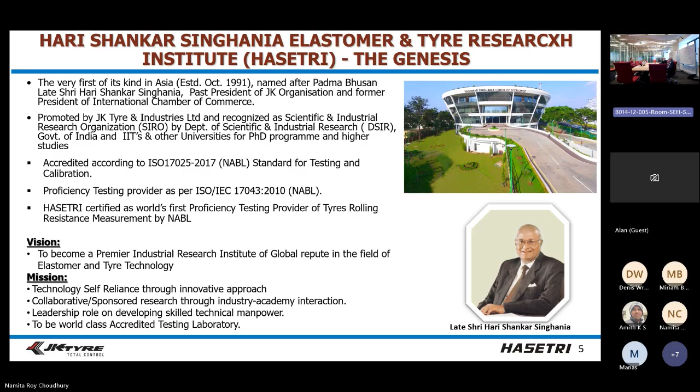Before going to my topics, I would like to say a few words.

Today's economics, our economy, is fossil based, crude based, and this economy developed when the earth housed 1 billion people. But today we have more than 8.2 billion people. The crude-based economy has got a certain problem.

That's the reason the problem is a lot of greenhouse gas emissions. You'll be surprised to know these 8.2 billion people consume about 1.6 times what nature can produce. So if you look today at which industry is mostly polluting, there are three.

One is the energy sector, second is agriculture, third is the automobile sector. The automobile sector produces 23% of the greenhouse gas emissions globally. Today we have 1.2 billion vehicles for 8.2 billion people, and by 2050 the population will be close to 10 billion, and the vehicle population will increase to 2.4 billion.

If you continue the technology what you're doing today, imagine how we can save our mother planet. This is one of the major challenges.

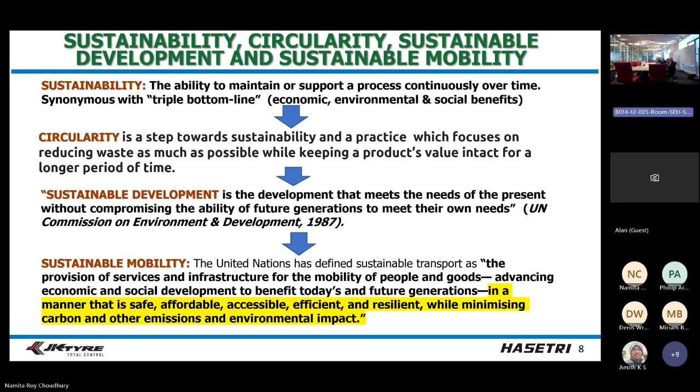When you say environment, that means the way you are manufacturing, the way the product performs. Suppose you make a product built to last. Today a tire gives an initial mileage of 150 to 200,000 kilometers, and after retreading it can give 600,000 kilometers. Now the challenge is, can you make it to 1 lakh kilometers more? That means you require less materials, energy saving, land saving, and so on. So that means built to last.

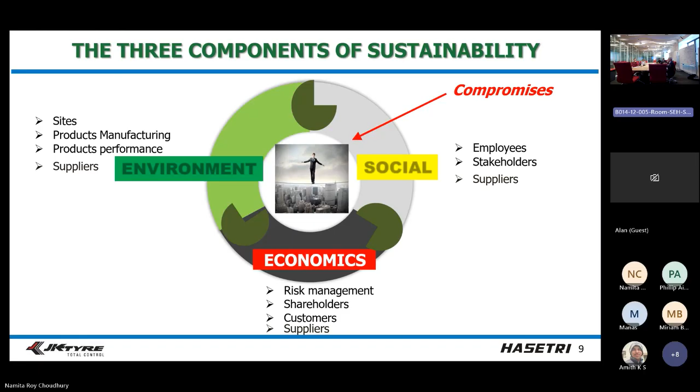Similarly, from the economics point of view, there's risk management, and you have to look at all stakeholders, meaning companies, employees, stakeholders, and suppliers. I will explain this gradually as we go.

Second is labor and human rights, that means forgoing the use of child labor and others, and you have to give social equality.

Third is ethics, there's corruption, anti-competitive practices, responsible information and management. Last is sustainable procurement.

In the rubber industry, consider that about 65 to 70% of cost is material, and out of that, 80% of materials are petro-based. So it's very clear, we are using carbon black, and this carbon black is manufactured from crude at very high temperature, 2200 degrees centigrade, then quenched to 900 degrees centigrade, where a hydrocarbon is split and then quenched to get carbon black. The amount of carbon dioxide generated is about 90% of the tire industry's responsibility from carbon black manufacturing.

Next comes the steel tire cord. Now, steel tire cord, as you know, comes from blast furnaces, so a lot of energy is going into it. So how can this steel, instead of blast furnace, be made using an arc furnace? The energy saving there is about 80%.

Third is the organic tire cord, polyesters, nylon, etc. Fourth is synthetic rubber. So these are the four major raw materials, and they are responsible for the highest amount of greenhouse gas emissions.

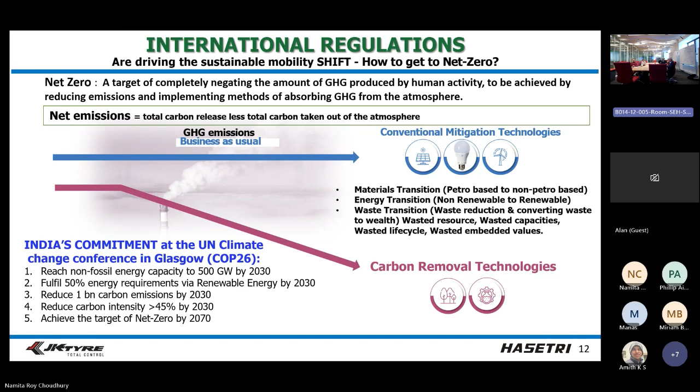So let me consider mass mobility. Instead of individual mobility, if you go for mass mobility, automatically per capita, the reduction will be sufficient enough.

But electrical vehicles are one thing - they can make the city clean. But ultimately, the charging has to be done from our normal source of energy, thermal and others. Unless these electrical charges can be done by solar or any other renewable energy source alternative, you cannot truly say the electrical vehicle is eco-friendly. But yes, for city cleanliness and other things, they don't produce greenhouse gas emissions directly - the city will be much cleaner. That's the reason people are going for it.

How is the automobile industry evolving? Initially it was the IC engine, then came the hybrid, then came the EV. Subsequently, what will come next in emission reduction?

Ultimately, this will come to fuel cell or ultimately hydrogen. That means we have to work towards the hydrogen economy.

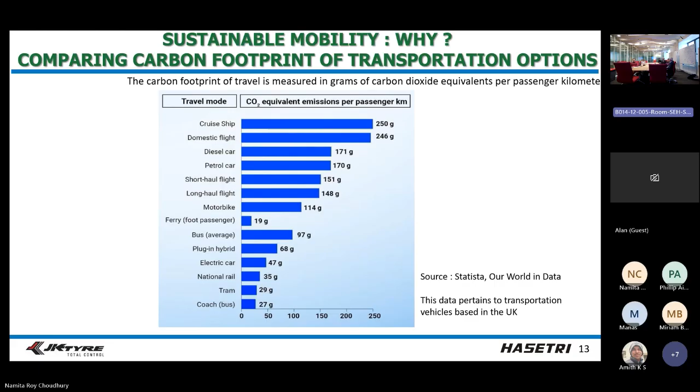India and China, whoever is doing this, since the greenhouse gas emission is going up rapidly, those who are exporters have to develop their products with green technology. That's the reason sustainable mobility is very important.

Now, if we look into that, what are the 5 business models? How to go for sustainability and circularity?

One is, but before that, I want to talk about another term called decoupling technology. Decoupling technology means the growth of the country, economic growth as well as human well-being, will go on. But how do we decouple the growth from resource consumption? What is our capacity? Let us be very clear.

Today we know that we have to produce more material. That means how can we decouple with less material but same performance. That's called decoupling. Second, growth has to be reduced with environmental impact.

Then when the product is on the drawing board, the design engineer must think about how my product will be low weight with same performance, how to use recycled material, or how after product use it can be recyclable. This type of thinking process should come while designing the product. This is called decoupling technology.

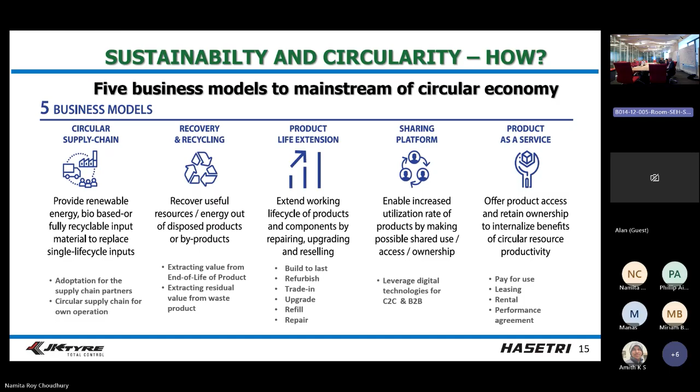Next, let us be very clear about what is actually happening in the mobility sector. The mobility sector has 3 dimensions of negotiation.

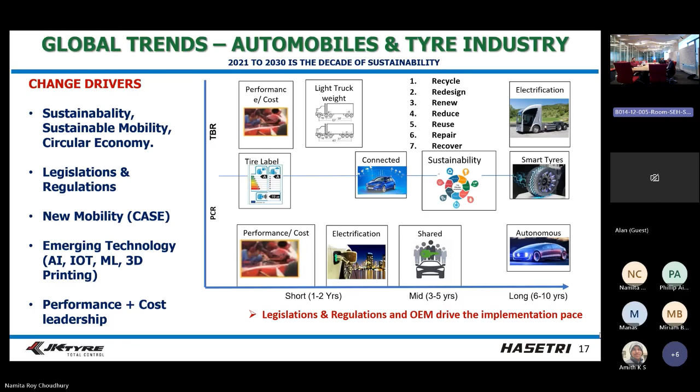Second is technical innovation in the auto industry. That means what is happening in the IT sector, IoT sector, and sensors first reflects in the automobile industry, and subsequently the automobile industry's innovations reflect into the tire industry. So that's what you can call business innovation across industries: automobile industry, tire industry, and suppliers have to work together toward green sustainability. So it's not that policy makers alone can do it, neither can the OEMs nor the tire manufacturers alone.

So what are the needs and the solutions? The need is decarbonization. How can you do it? Lower weight and energy efficiency, so there are less greenhouse gas emissions. Second is the circular economy: recycling and waste reduction. Third is...

...the autonomous car. That means you want your vehicle to be carefree, with no disturbance in between. That's the development that's coming: sustainable mobility leads to sustainable tires and auto rubber components, and then sustainable design, sustainable materials, sustainable manufacturing, and ultimately you have a solution. If you look into all those things together, everybody has a role to play.

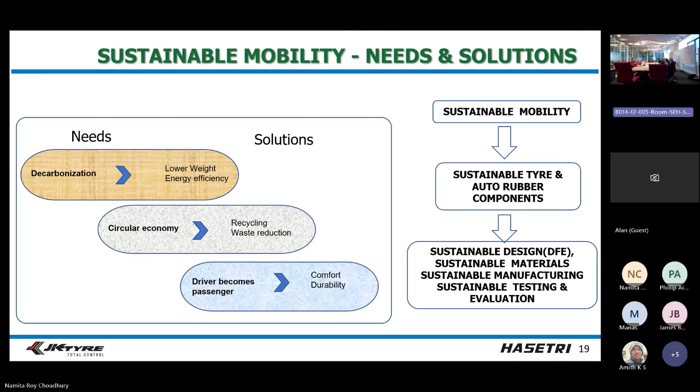Now, next, this is future mobility as already explained. You see connected, meaning vehicle to vehicle. That's why accidents happen, suppose a vehicle is taking a right turn or left turn, so the vehicles will be connected together. This is called vehicle-to-vehicle, which requires infrastructure, and Japan is very much ahead in this.

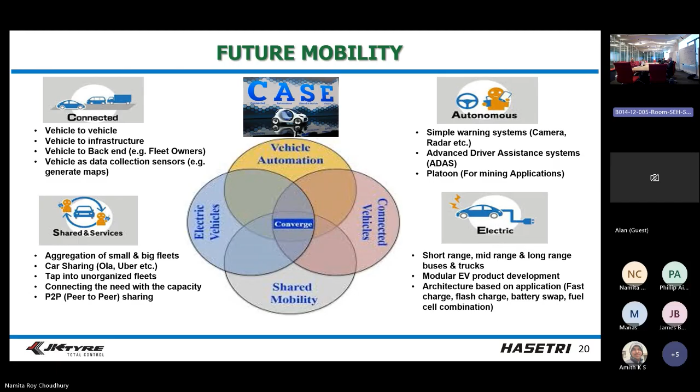Then autonomous, electric, and shared. Shared we know, electric we know, autonomous means a simple warning system with a camera and radar. Today all vehicles need a 5-meter braking distance. What does the sensor in an autonomous car do? If there's a bump or hump ahead, it already controls the speed of the front vehicle because the sensor directly controls the vehicle and stops it. That's called an autonomous, driverless vehicle. It can notify by voice directly, and opening doors and everything will be autonomous; the sensor will handle that. So, number three.

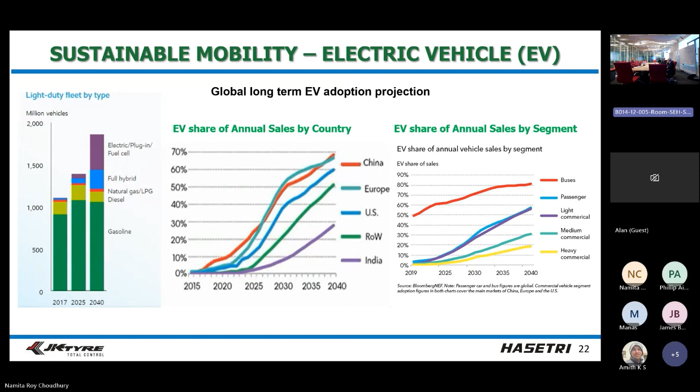Now next is very clear, this is actually how I've already explained that one. Next, this is the vehicle market, how the EV vehicle is going. Automatically, if you look that way, see all the countries, China, Europe, US, rest of the world, and India, everybody's vehicle is growing, and on the right hand side you can see the segment wise breakdown.

This is the drive technology: fully hybrid vehicle, battery electric vehicle, and fuel cell. When you convert from one to the other, your rubber components and others will change. For electrical vehicle thermal management under the bonnet, if the battery gets discharged, if you cannot control -10 to +50 degrees centigrade, if the temperature is below -10 or above 50 degrees, the battery will get discharged. That means the heating and cooling system under the bonnet will be totally different.

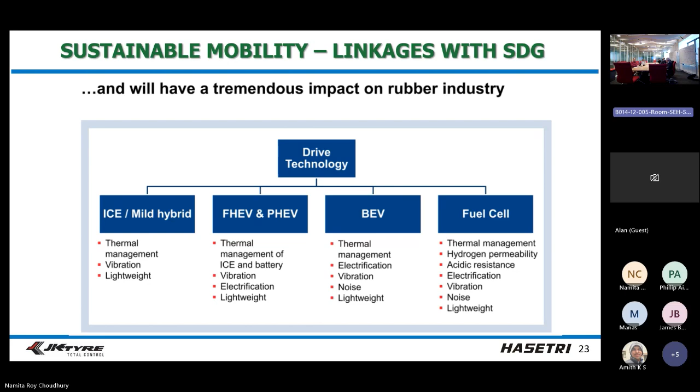Similarly, if you have hydrogen, as you know it is a fire hazard, there's hydrogen permeability, so all rubber components need acid resistance, and then we have lightweighting, vibration, noise. So every change in your vehicle system, automatically the drive technology, affects all rubber components, because rubber components provide isolation and insulation through elastomeric rubber materials. These are the electrical vehicle requirements: thermal management, lightweight, electrification, noise, vibration, harshness.

Now if you look into electrical vehicle versus petrol and diesel, total generation - as I told you, electric vehicle will be cleaner in the city, but the total carbon dioxide generation throughout the life cycle, including charging, is the highest. The CNG hybrid will be 89. That is why the Japanese believe that instead of jumping directly from IC to EV, they are going for hybrid.

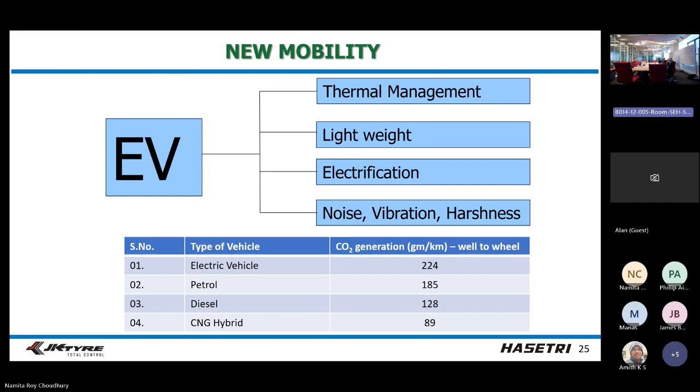Next comes the regulations, which are very important. What is the upcoming regulation? You call it Euro 7, there is tire abrasion, the tire rubber wear particle. Take a 4-passenger car - over the whole life of the tire, each tire weighs about 5 to 7 kilos, and each tire loses 1 kilo of rubber particles. That means 4 kilos of rubber particles per passenger car over the whole life of the tires.

This particle distribution may range from 2 micrometers to 10 micrometers and above. The 2 to 10 micrometer particles go into the atmosphere, and those above that go into underground water. So the regulation is coming that you have to mention, after every 100 kilometers, what is the weight loss of the tire at a particular load - weight loss per kilo per 100 kilometers. That should be a specification. That means there is no equipment yet for this; today we have to develop equipment. You have to wear the tire in a laboratory, collect the sample, determine the aggregate size distribution and particle size distribution, and then accordingly get certified.

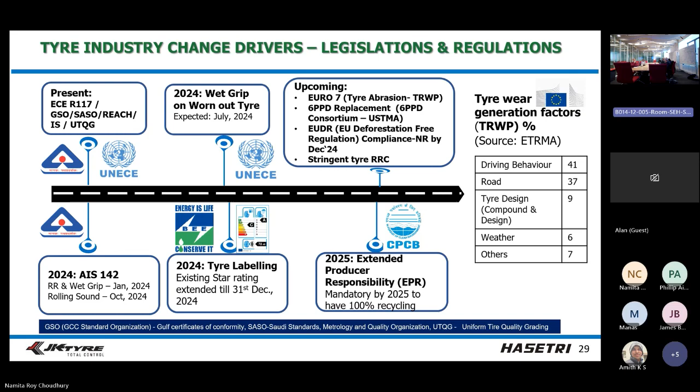This is the 6PPD - I'm not going into how the 6PPD ozone attacks. Now this is called the Deforestation Act. Under this new regulation, there's an obligation applicable by December 2024 that any commodities must be produced legally on land that was not subject to deforestation or forest degradation after December 2020.

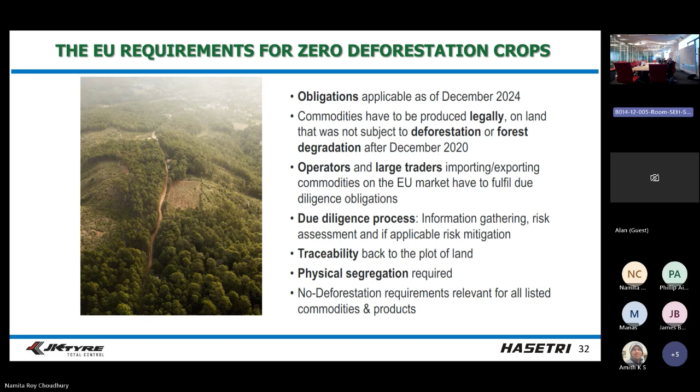Now there's due diligence in the process - traceability, physical segregation - there will be a certifying agency. They verify that you have procured natural rubber from a tree grown on fresh land, not deforested land.

Then what are the regulations that apply? These cover oil, palm oil, soybean, and rubber. So rubber is coming under that deforestation regulation. Then you cannot export without compliance.

So these are the rubber materials I already told you about. In rubber material, there are two things: one is called reactive material, another is called stable material.

Reactive materials means the fumes we get in the factory - there's reactivity, this fume may be beside the moisture. You get nitrogen dioxide, sulfur dioxide, H2S, carbon dioxide, carbon monoxide - all those things. So these gases are really considered from silane, adhesive, accelerator, sulfur, stearic acid, retarder.

These are reactive. Then comes stable material - that means tire wear. These are the particles where the polymer, the carbon black, mineral oil exist. So we have to consider how we can manage reactive materials with the fumes in the factory - not only the user state, the factory also has to consider this.

The factory has to certify, as I told you, with international sustainability carbon certification. They will come, the auditor will look into how we are reducing. Second is the stable material regulated by legislation like TRWP and so on.

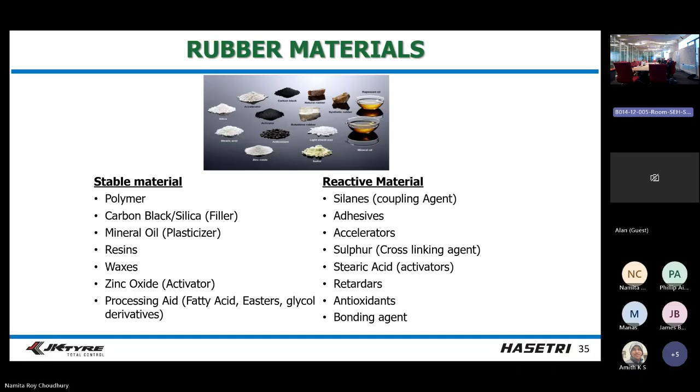Similarly, if it's carbon black, ultimately you have to go for silica or reclaim - the waste rubber is that. That means using recycled material makes the tire greener. So these are the trends: brown marking is petrol-based material, green marking is environmental - this is the fight today, worldwide. Ultimately, over the next 30 years, you have to reduce petrochemical content to 20%, with 50% natural-based, bio-based material, and 30% recycled material.

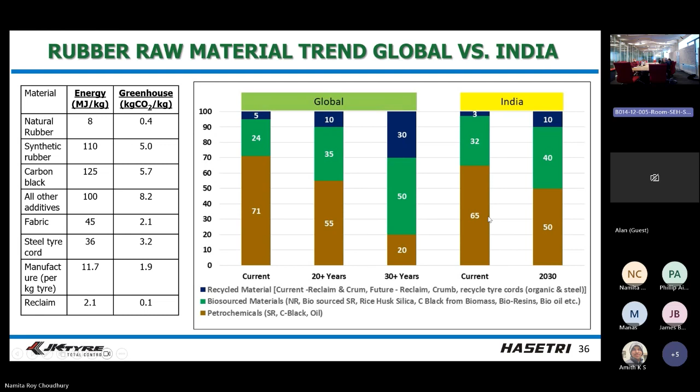This trend is going globally, and this is the trend for the next 5 years in India. Next, this is how manufacturers are doing it. You see the biorefinery - today we are making fossil fuel based synthetic rubber, but ultimately it must come from biomass.

These are the different types of tire materials. I'm not going into detail, but these are the different materials.

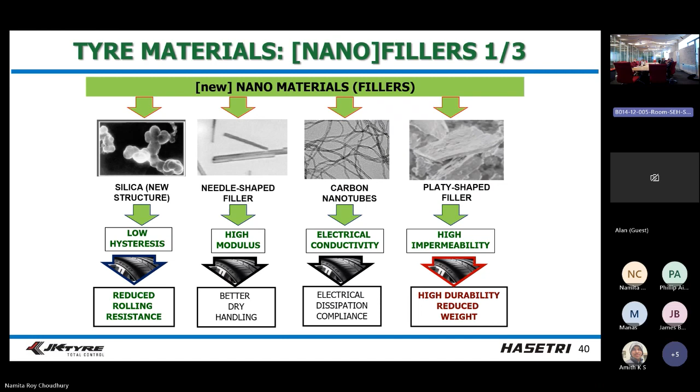Let us consider nanomaterials - silica, needle-shaped filler, carbon nanotube, or platy-shaped filler. These are future materials. You can partly replace carbon with these because they have interlocking mechanisms for all the nanomaterials, giving you more reinforcement. 20 PHR of carbon black - 20 parts - can be replaced by just 2 to 3 parts of nanomaterials.

I won't go into detail on how they differ, but these are certain examples of how you can get different materials from biomass. As you know, in the paper industry, waste material from plant origins gives you lignin. Now lignin is one of the materials that tomorrow's manufacturers will partly use to replace carbon black.

The mixing technology still has to develop - all of Europe is now researching lignin, looking at how this waste from the paper industry can be a source to replace crude material or be a different source of chemicals. Similarly, rice husk can provide silica. This is very important - we have already made tires with silica from rice husk.

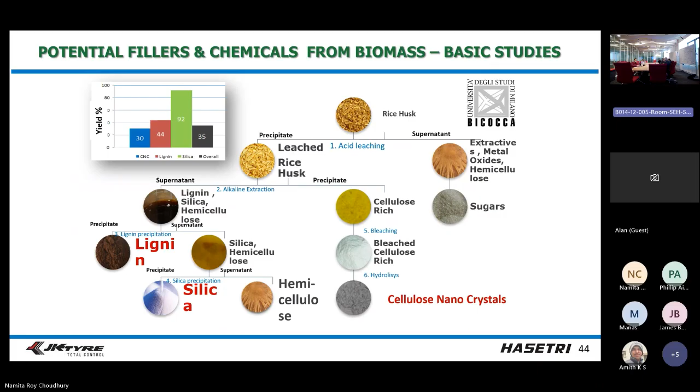So a lot of factories are coming up in India. This raises the question of what is the raw material category for ISCC, International Sustainability and Carbon Certification. There are four categories: bio-based, biocircular, circular, and renewable.

If you make a tire, biocircular means using whatever materials you can find in that category. So today, soybean oil and sunflower oil can be used by replacing crude-based oils.

In the case of tires, we have natural oil as I mentioned, then bio-based silica from rice husk. Then you have polyester, from recycled water bottles, PET, you get polyester tire cord. All polyester bottles we recycle, we make a polyester tire cord.

Then we get reclaimed rubber, recovered carbon, and recycled bead wire. All the steel is also going for recycling.

Sustainable carbon black: in the USA, one plant is coming up with 200,000 ton capacity using monolith technology. What they do is take methane from biomass, crack the methane to get carbon and hydrogen, and send that carbon to polymers and hydrogen to ammonia and fertilizers. Necessity is the mother of invention, and they are developing all this technology now.

Consider the tire industry: it consumes over 55 million tons of raw material, and this capacity was built up over the last 75 years. So for biowaste, it will take another 30 to 40 years to create that same capacity.

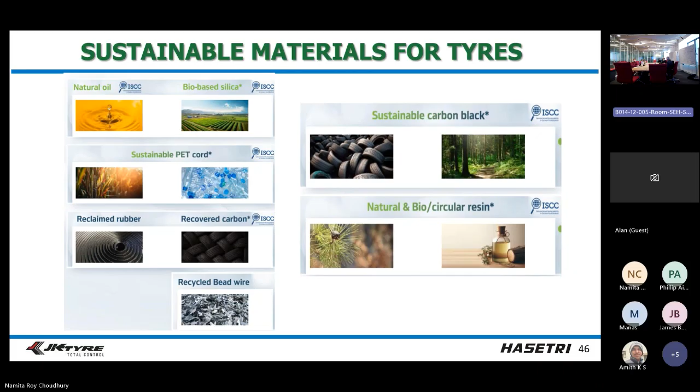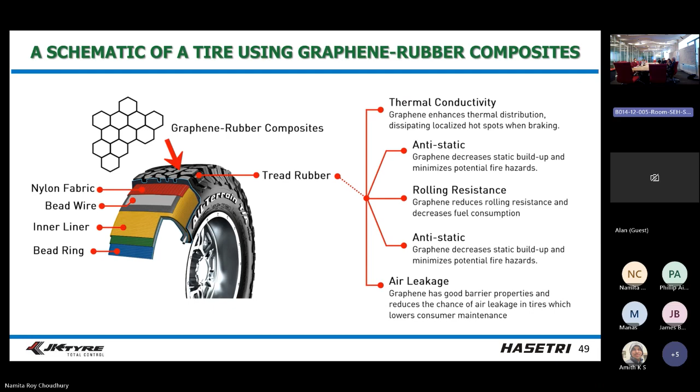Now let me tell you about graphene and how the tire industry uses it. Graphene has three types: one is called graphene oxide, another is reduced graphene oxide, and the next is pristine graphene.

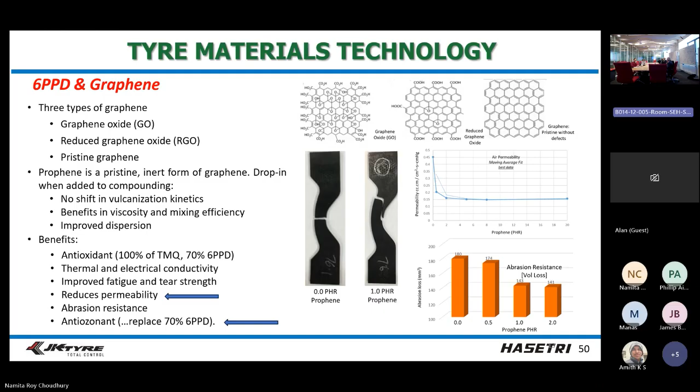The only problem we face is that it's difficult to mix. So new mixing technology is needed; instead of solid phase, you have to go for liquid phase. These are the trends in rubbers, as I've already explained regarding carbon black and other materials.

Then reuse and recycle. As I mentioned, waste tires can be used for energy recovery as tire-derived fuel or boiler fuel in cement kilns. The calorific value of tire is equivalent to that of coal, and cement industries use a lot of coal, so tires can replace it, but it must be done in an inert atmosphere so it doesn't create pollutants.

Similarly, crumb rubber can be processed ambient mechanically or through cryogenics, using the glass transition temperature to make a fine powder - these are called micronized rubber particles. Then there's ultra high pressure, UHP, where directly under ultra high pressure you get total tire crumb, which is a pure substance.

Then we have devulcanized rubber, which may use chemical, mechanochemical, ultrasonic, microwave, or biodesulfurization methods. For biodesulfurization, microbiologists, chemists, and others have to work together - if you develop an enzyme to remove the sulfur from the processing, you get a virgin polymer. A lot of research is going on in this area.

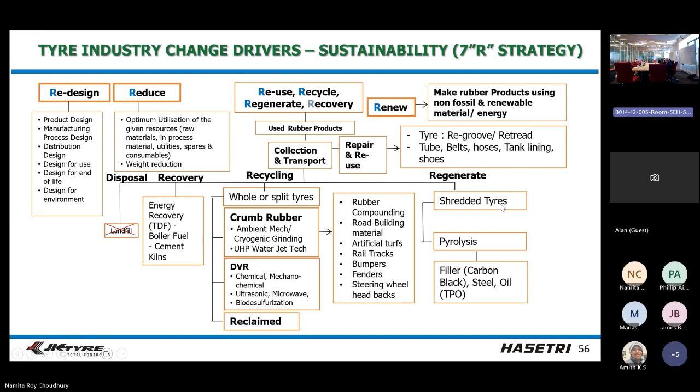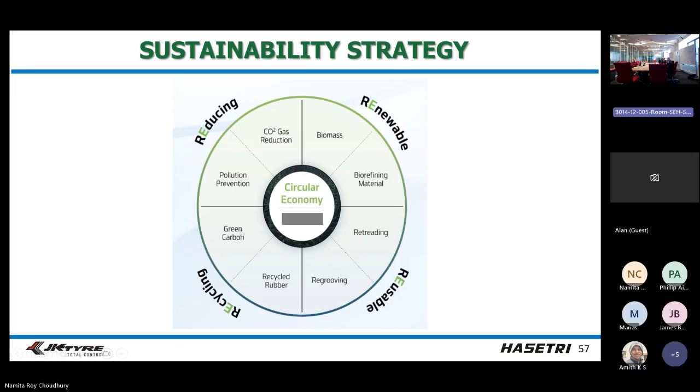Then we have regenerate - reducing means addressing carbon dioxide. If you focus on reducing, you get greenhouse gas emission and pollution prevention through renewable biomass and biomaterials. If you focus on reusable, that's retreading or regrooving, and recycling gives you recycled rubber or green carbon. These are the advantages of adopting a sustainable strategy for materials.

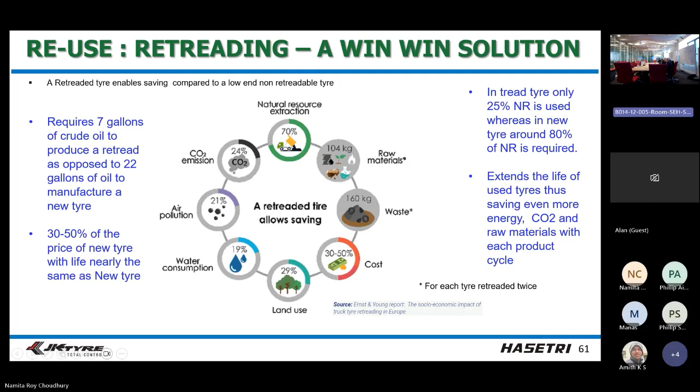In Australia, I know we are working with the University of New South Wales, they call it green technology - this is called Green Distillation Technology Corporation, GDTC. And they're doing very good work, completely putting in the tire directly and getting it in an inert atmosphere. But the problem is they can give the oil to the refinery, but they cannot sell the carbon black to the industry - there is no tire manufacturing for it.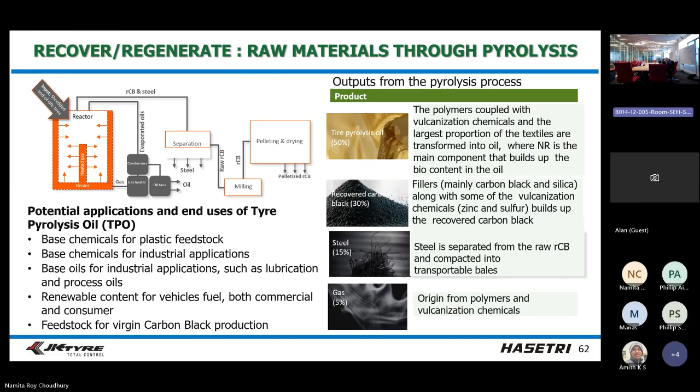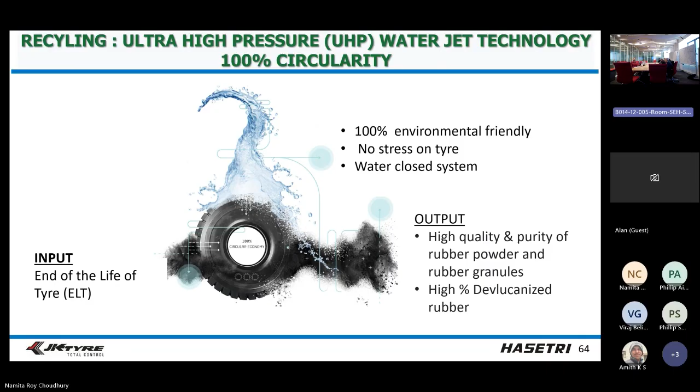Let me be very clear about this - this is the last slide. Carbon capturing mechanism, what Exxon is doing. You might have seen this slide. What they do, this is called the Empire State Building - the depth of the mantle is so deep, you have to go far underground. So all the carbon dioxide, just suppose they're refining and extracting - when they're extracting, there's a lot of vacuum space available. So they're producing and feeding the carbon dioxide there, so it gets trapped. This is carbon capturing technology.

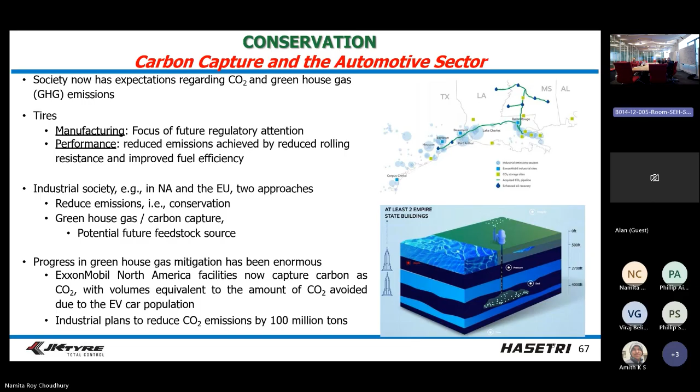So gentlemen, the challenges are there itself, as I told you. And this is the future car - look at how the future car will be. This future car directly has whatever hydrogen fuel tank you need. You might have seen fuel cell stacks, body attachments, etc. And this is the cabin heating system, side mounted radiators. So the wheel motors, there all will be sensors.

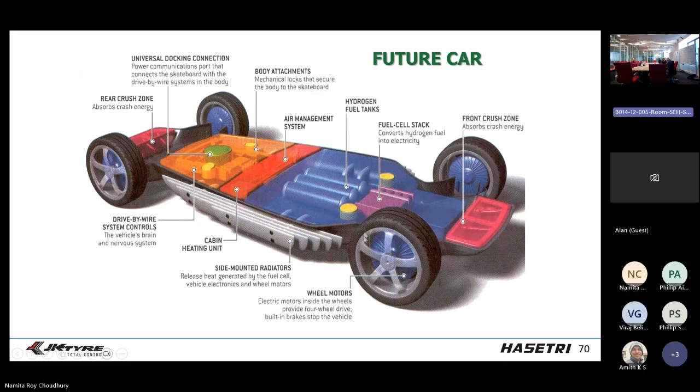This is about the future car, what are hydrogen fuels. And this is about what is happening with sustainable aviation fuel, which is for the plane. They are considering these two totally different things.

Sustainable aviation fuel means fuel produced from renewable, non-petroleum feedstock, including municipal solid waste, woody biomass, waste oil, agriculture residue, and carbon-rich waste gases. From there, they are actually collecting the oil.

Already today, 5 to 10% blending with the fuels has started. Everybody is working in that direction because the plane is one of the highest emitters.

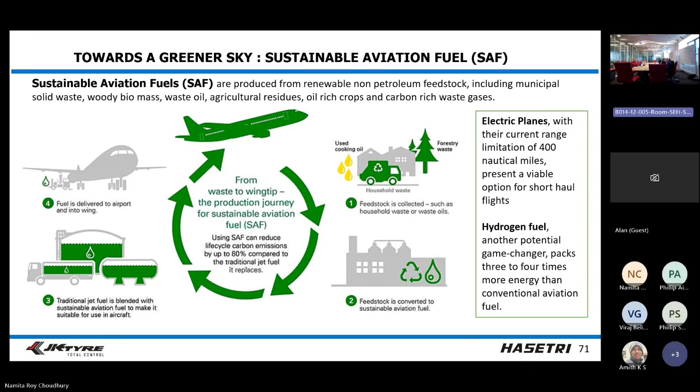Similarly for the sea, we don't think about it as much as we think about cities. At sea there is diesel, and transporting causes pollution, with carbon dioxide emissions coming into the atmosphere. So what is required?

Better awareness is required, and students must know this. It has to be included in the curriculum - what is the future technology? Better awareness, disruptive technology, policy changes, innovative funding models, and collaboration and partnership - these are critical factors for sustainable economics and sustainable development.

We have to join hands together. Just like computational material science, biosource material, sensor and digital technology, and recycling technology are going to shape the future of the tire rubber industry.

Next is the challenge faced by the entire society - it's difficult to stand alone, you cannot find solutions that way. A collaborative framework with the entire supply chain is the best way. Support from the government and academic institutions is equally important. There are material manufacturers, component manufacturers, and OEMs - automobile manufacturers - they have to work hand in hand.

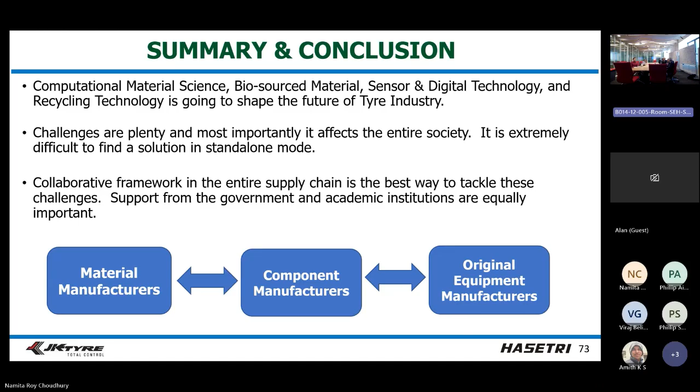So these are things JK Tyre has done in the last 5 years, you might have seen. We have 60% power from wind and solar, and water harvesting - for about 3 months we are doing rainwater harvesting to add a lot of the water we consume. You might see the table and so on.

Last but not least, we are the first in India to make a passenger tire of 15 and 17 inch with 80% sustainability, and these are commercially being tested. We use biosource synthetic rubber, natural rubber, rice husk silica, polyester tire cord, recycled polyester tire cord, as well as esterified soybean oil.

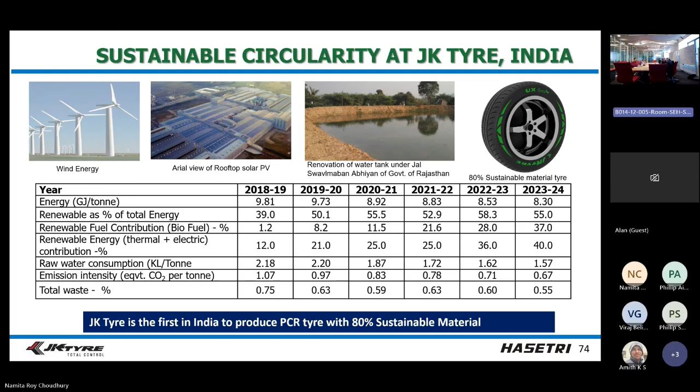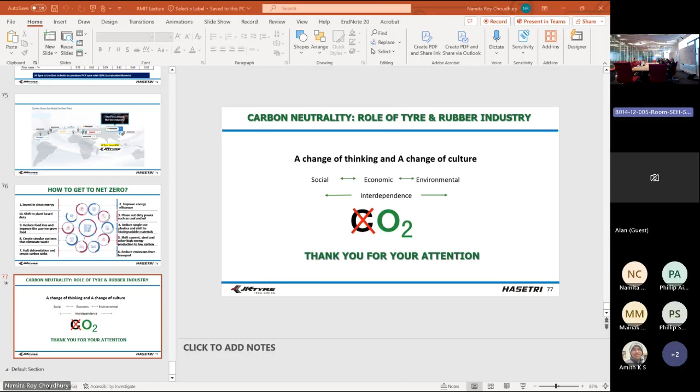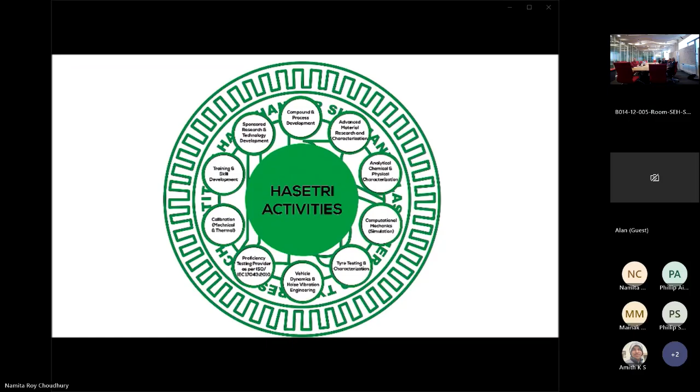This is a this is our institute. This is our reception area. Infinite, you are giving the research as not fixed. It is infinite. This is our activity, what we do.

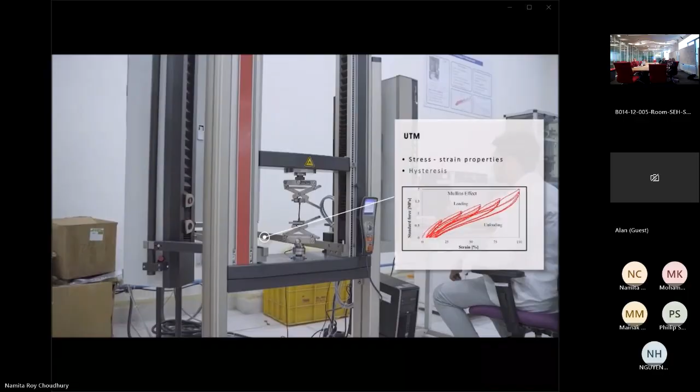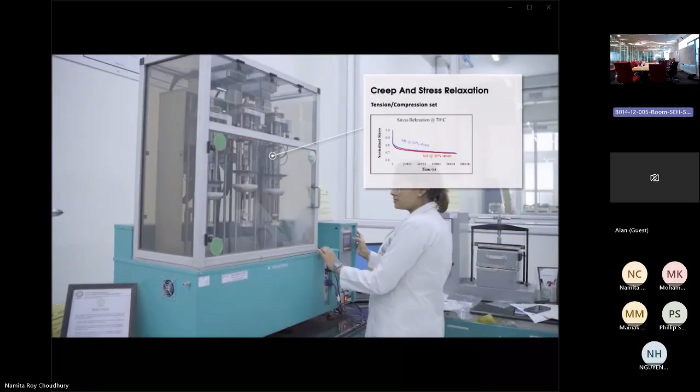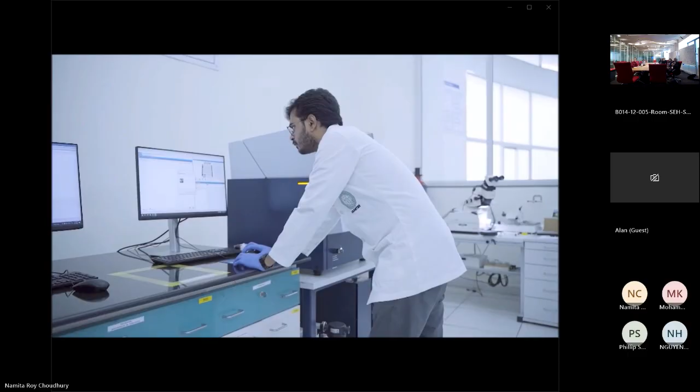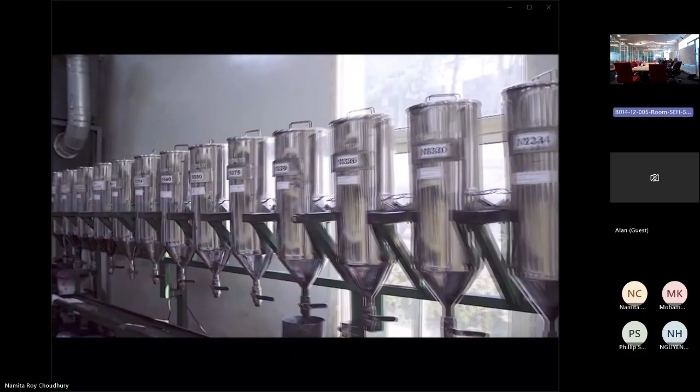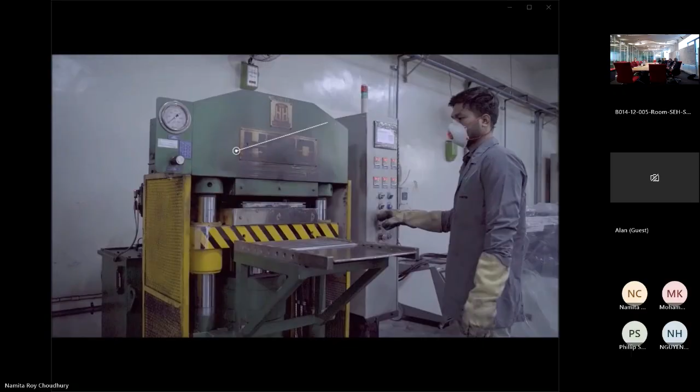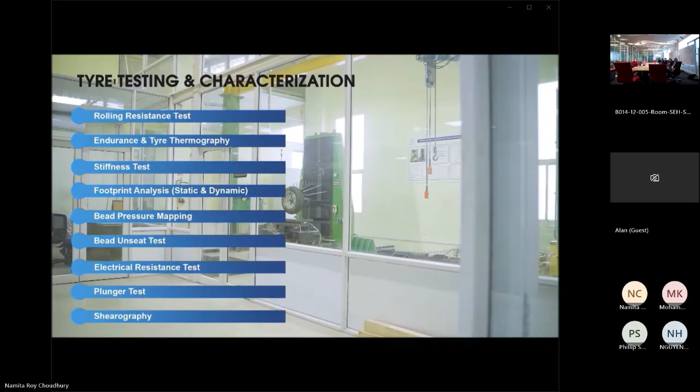That would be very effective actually.

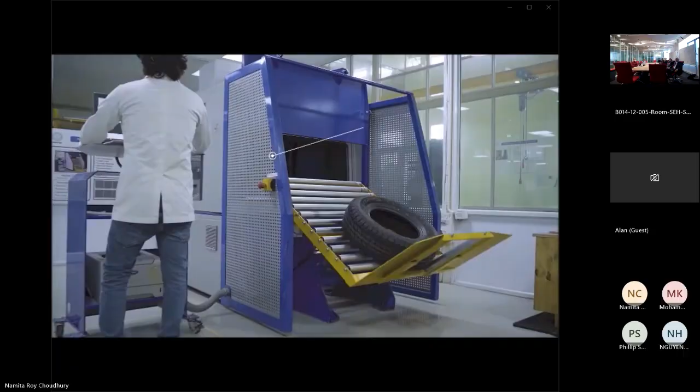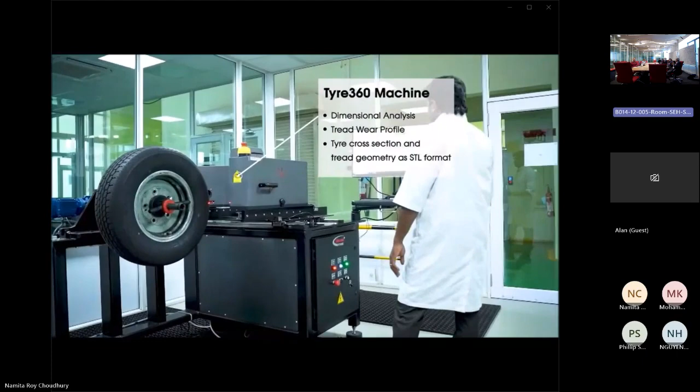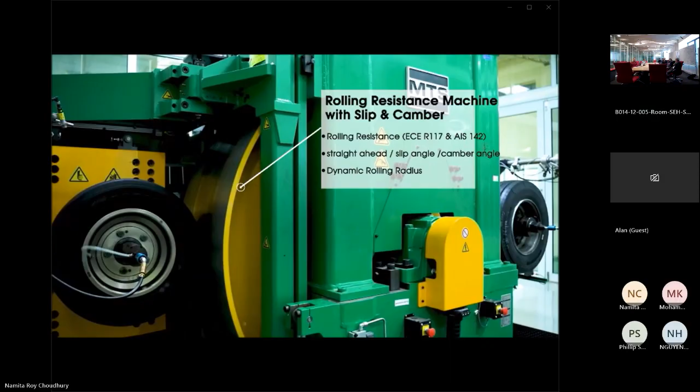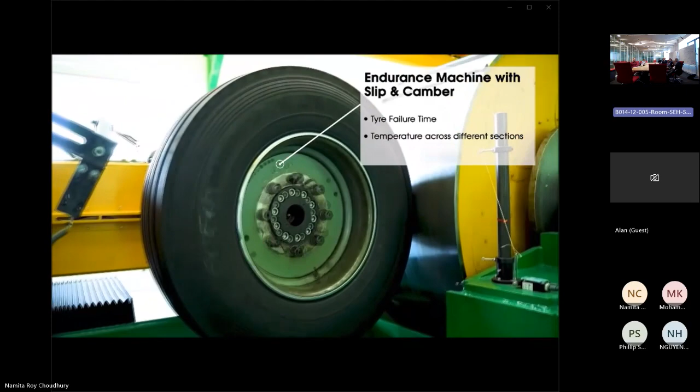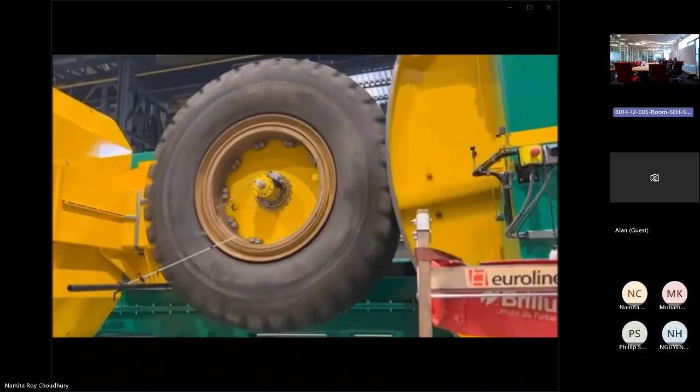It's a road test, or handling test - a double lane change, or changing the lane. It's a skid test.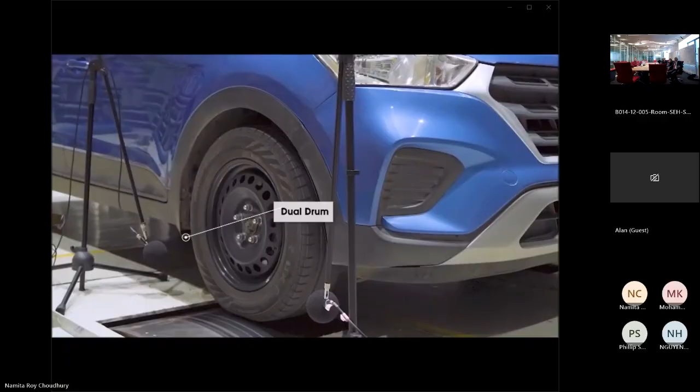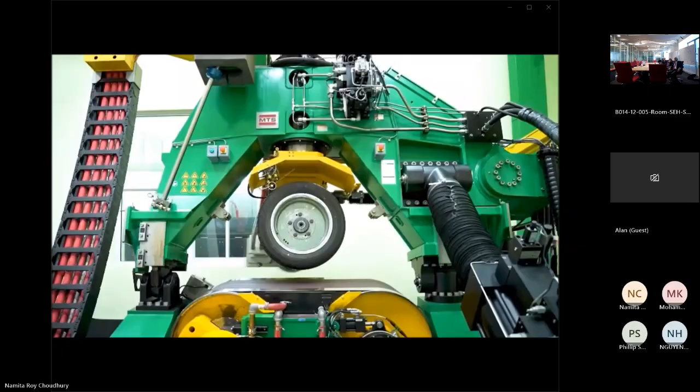Your anechoic chamber - so this is for two-wheelers. The completely assembled four-wheelers come directly - you see the vibration, there is a microphone, they capture the vibration sound. See the machine called Flat-Trac, one machine, for the force and moment.

But all OEMs, they get the data. See, this is the road, tire, then the vehicle - you don't need a vehicle system, we can simulate it in the tire. You can set camber, load, speed, everything.

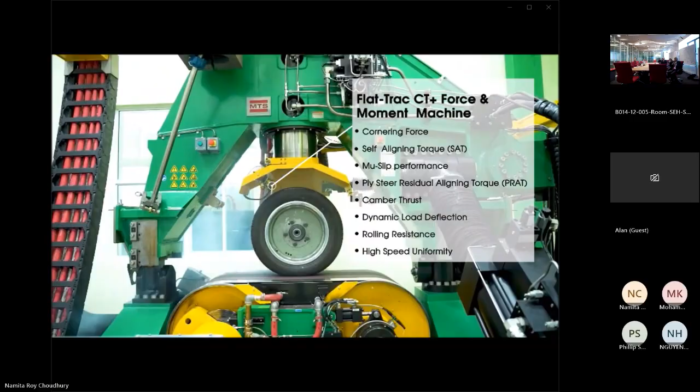Trying the force and moment test. We have our own calibration report - for all sales and other purposes, because calibration is very important for everything. Calibration.

We have environmental data - water analysis, effluent analysis, gas analysis.

It's our lecture room. All Nobel laureates who were in the tire and polymer industry, their pictures are there.